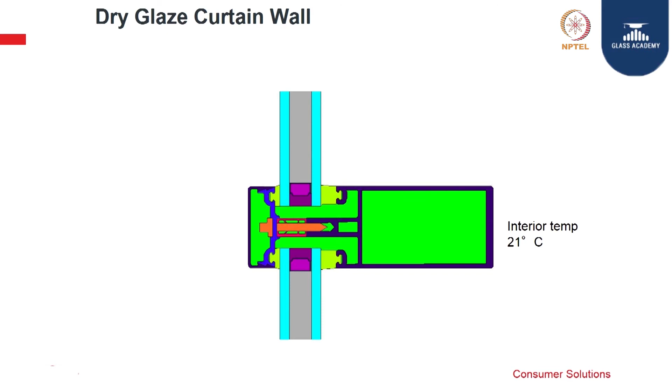I am going to talk about the fixing methodology of DGU, and then we will go into the details of every seal. I am quickly taking you through this to give you a feel of how you fix a DGU, and how it also conducts temperature in a climate like ours, which is hot outside.

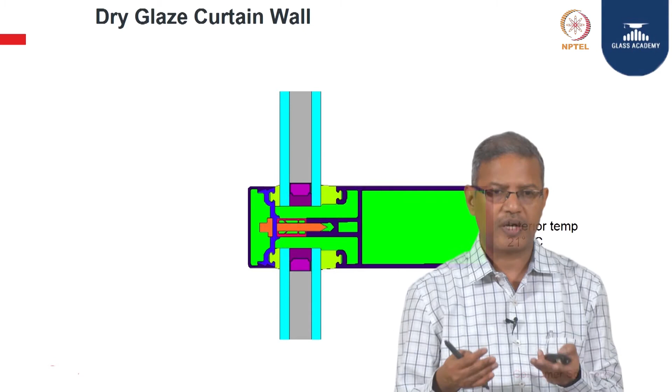So you have a thermal conductivity which happens when you have systems which are dry fixed, in comparison to structurally glazed facades. So you have an EPDM gasket system, and this is a pressure plate being used, and you also have a thermal isolator. This system is fixed in a dry manner.

You do not use a silicon, you use gaskets to completely fix this. So you need to maintain an interior temperature of 21 degrees. Generally the aluminum frame is of this size, and there is a DGU used, which has got 6 mm glass, 12 mm airspace, desiccant, primary seal and secondary seal. This system is called a dry glaze system.

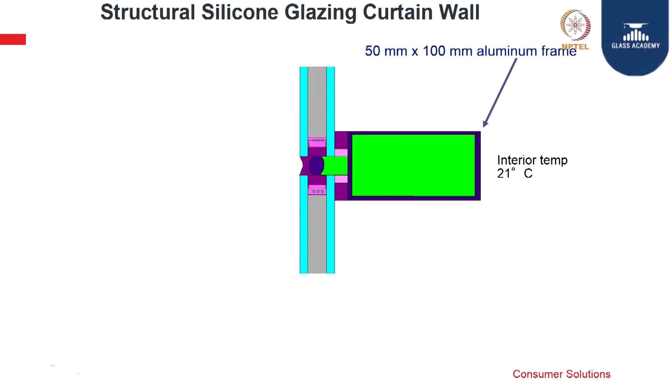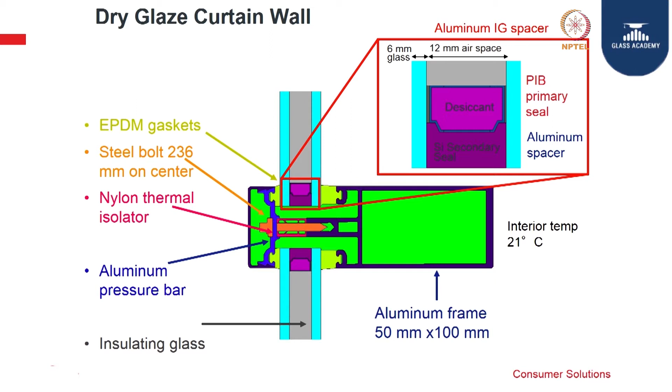Now we will see what happens when you subject it to atmospheric conditions, and before that I will also take you through the other system called silicon structural glazing curtain wall system. If you see here, there is a silicon secondary seal and a desiccant system, and an aluminum spacer.

Here we are looking at structural silicone glazing curtain wall, and we are also talking about a system wherein you do not have a mechanical capping from outside, so there is no conductivity which happens because of that. You have a glass structurally bonded to the aluminum using a silicon sealant, and there is a weather seal. So this is thermally completely isolated, and you do not have any connection which happens here.

The joint dimensions are mentioned here, this is the bite and this is the glue line thickness, and here the secondary seal is inside the DGU. There is also a backer rod applied for the weather seals.

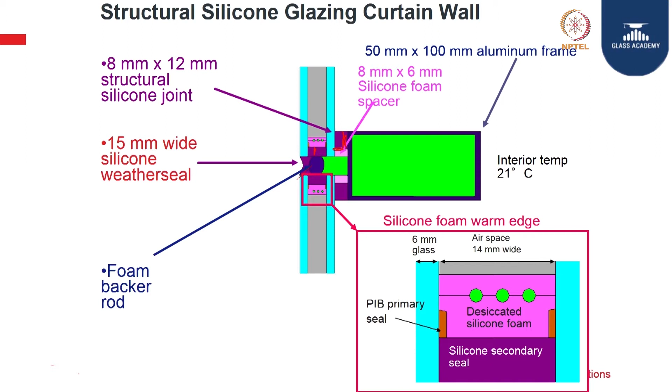So there are 3 different silicons, or sealants, which have been used to hold this unit together, with the same amount of aluminum frame. And what we are talking about here is also different desiccated silicon foam spacers, which are called thermal spacers.

What happens for the temperature evolution for the SSG system at 50 degrees? Imagine there is 50 degrees centigrade, and you have a high performance glass with a silicon spacer, and you have a high performance glass with an aluminum spacer.

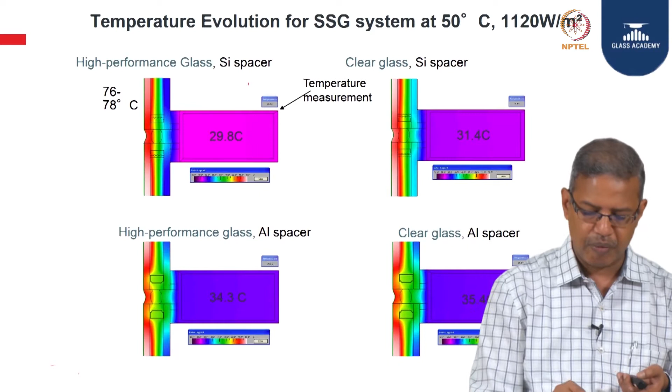Here we are talking about a difference with the same way of doing the system, and then we see the temperature difference. So what you have here is, when you have a temperature evolution at 50 degrees, you get 29.8 degrees when you use a thermal silicon foam spacer, compared to the aluminum spacer, which is 34. So there is a difference of almost 5 degrees here, 4.5 degrees, where the temperature becomes warmer compared to using a silicon foam spacer.

So here it is a clear glass comparison. It is 31.4, because there is a clear glass with no coating, so naturally the temperature is going to go up, and with an aluminum spacer you get 35.4, which is around 4 degrees difference. So what it essentially shows is, just by using a silicon foam spacer, you can also reduce the temperature, and what the conductivity is, and what happens through the system.

So this essentially talks about just doing a difference of silicon spacer versus aluminum spacer, with high performance glass versus clear glass. There is always a difference of 1.6, and within these two, 4 degrees and 4.5 degrees.

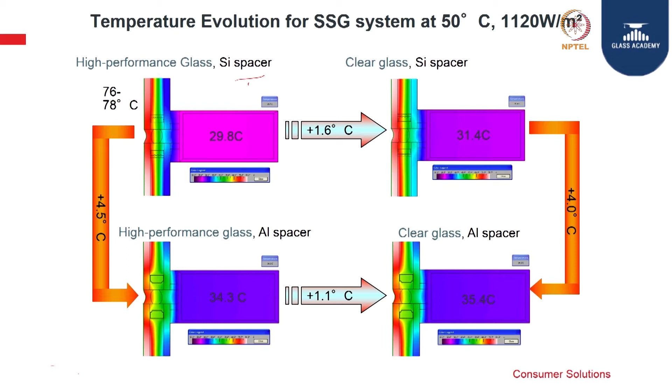And a dry system versus wet system, we saw the dry system, now we are going to see the wet system, which is silicon glazing versus the gasket fixing.

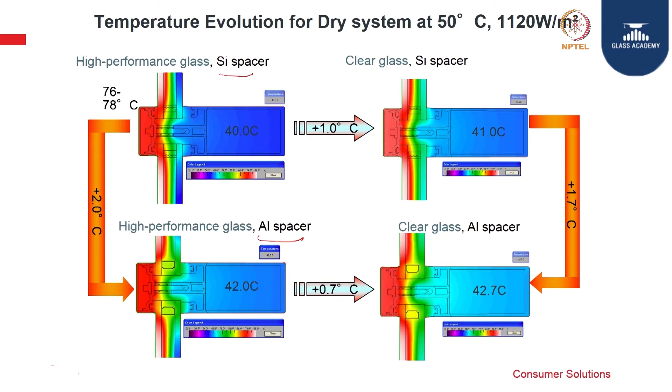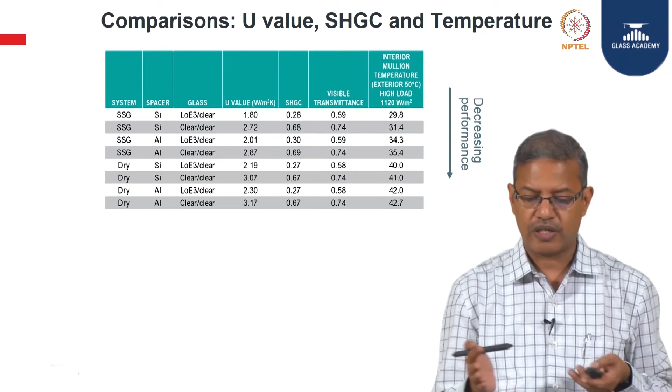So essentially what it talks about is, just by doing a proper selection of the spacer as well as the way it is bonded to the structure, you get very good temperature reduction, and silicone structural glazing again gives you the best possible thermal reduction.

There is a way of doing the bonding applications. So, some of the things we saw, that is the same thing put here. This also talks about the U value. If you have a silicon spacer and an aluminum spacer, what is the reduction of the U value, or how it becomes really good to have a lower U value, because you get 1.8 versus 2.01 when you do a silicon spacer versus an aluminum spacer.

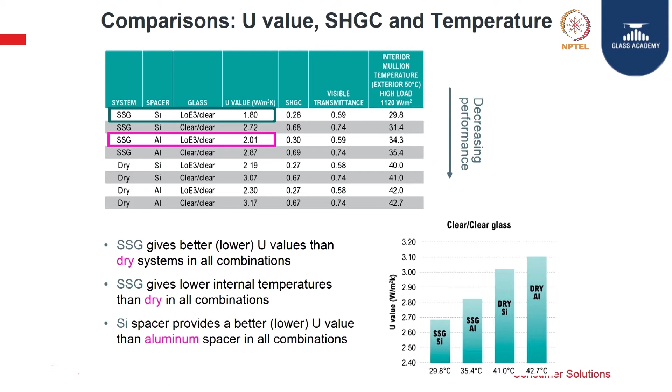So what we are talking essentially is, you get good durability, and it gives better U values than dry fix systems. So, structurally glazed systems give you better U values than a dry fix system. SSG gives lower internal temperatures than dry in all combinations. You use any combinations of dry fixing and structural bonding, naturally you save. Silicon spacer provides a better U value than the conventional aluminum spacers.

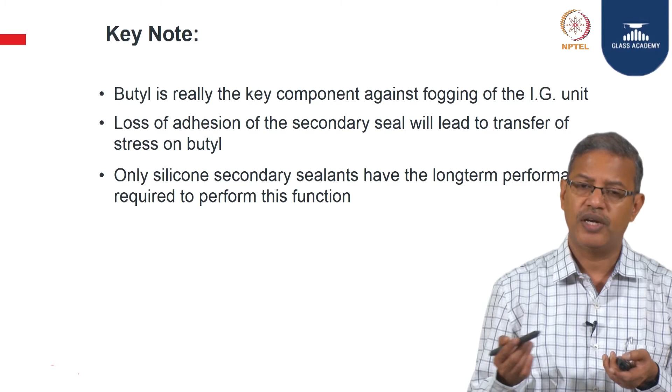So, the key note here is, if you remember, we saw the keynote earlier about sealants and the essential way of doing seal applications. Now, the keynote here is butyl is really the key component against fogging of the IG unit. Any stress on the butyl and there is a failure, that can lead to IG failure. Loss of adhesion in the secondary seal will cause stress on butyl. Only silicone has the best long term performance.

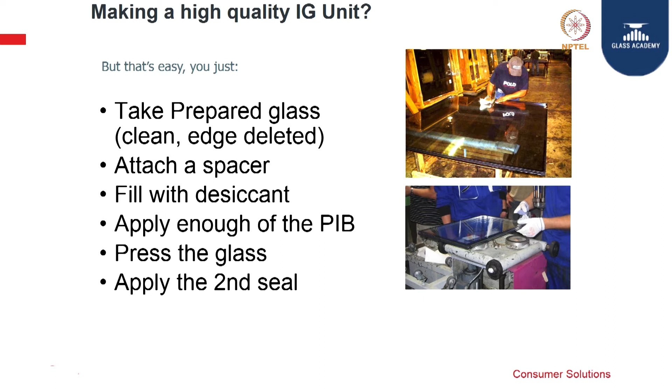So now we will come to the application part. We saw the chemistry part, we saw the different testing and experiments, and we also saw how a combined system of primary and secondary seal with silicone and PIB gives the best durability. We also saw the ways of fixing the DGU with dry and wet glazing, and the effect of that on the U value, and how, by choosing the right coating, the U value can be reduced and also the solar heat gain can be reduced.

So these are all essential parts of DGU, but when it comes to manufacturing of DGU, the application is very critical. So how you do it is: take a prepared glass, clean it, and if it needs an edge deletion, delete it properly using the proper gauge grinders or the mechanism suggested by the manufacturer, then attach a spacer.

So before attaching the spacer, you need to cut it to the size of the glass, then clean the spacer, fill the desiccant, apply enough PIB around the perimeter of the spacer, press the glass, press the spacer, press the glass again, and apply the secondary seal, either manually or by robotic application.

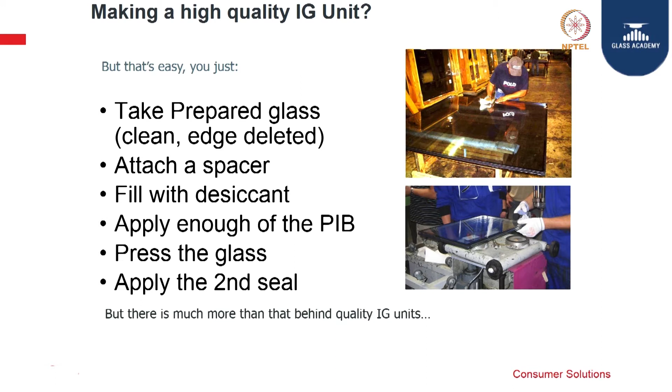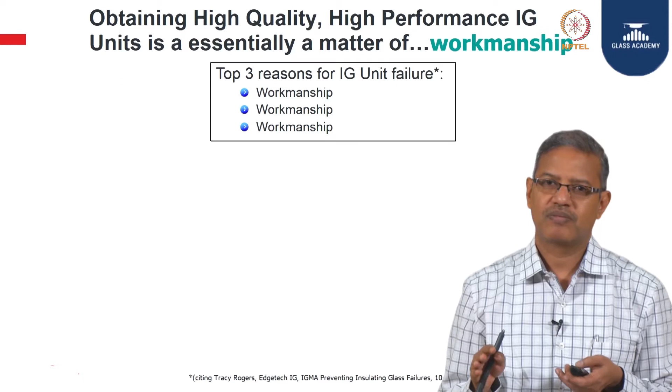But there is much more behind these IG units. So, what are the top 3 reasons for IG unit failure? The top 3 reasons for IG unit failure are workmanship, workmanship, and workmanship. So it is very important. You can design well, you can choose the right product, but if the workmanship is not good, you will essentially end up with a very bad quality DGU.

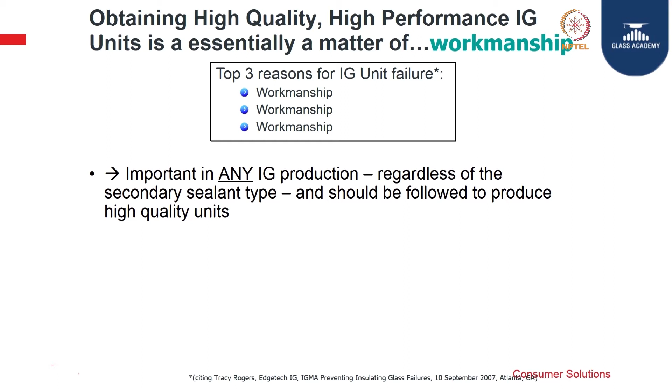Any IG production, regardless of the secondary sealant type, should follow a high quality production process. So what are the things that influence the performance of DGU? The spacer is a very critical component here. The type of spacer used, how you join them, how you fill the silicon desiccant into the spacer - they are all very critical. I have a slide to run through the spacer which I will take you through.

PIB application - how do you apply the PIB? This is a very small amount of primary seal applied on the butyl spacer. There are standards that specify the minimum grams per running meter you should have, which is approximately 3 grams per running meter minimum, and there is a width and thickness specified. It talks about filling that complete band, which is good for long term durability, with a thickness of say 0.3 or 0.4, so it's about 2.7 to 3 grams per running meter per side. You have to apply it accordingly.

Pressing of the panes - the glass panes should be properly pressed so they come into good contact with the primary seal and the spacer properly, then apply the secondary seal.

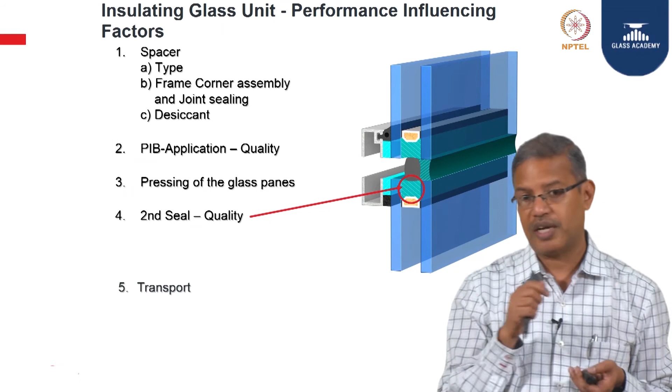One more thing which is essentially important is, before applying the secondary seal, we should ensure that the spacer is cleaned. So the spacer cleaning is very important to get good bonding of silicon to the glass edge as well as to the spacer.

Transportation is key. We need to transport only when the sealant is cured completely. If you do a transportation before that, there is a lot of stress which will come onto the sealant due to the vibration during transportation, and that can affect the adhesion of sealant to the substrates, and what you will essentially have is a gasket, not a bonded material.

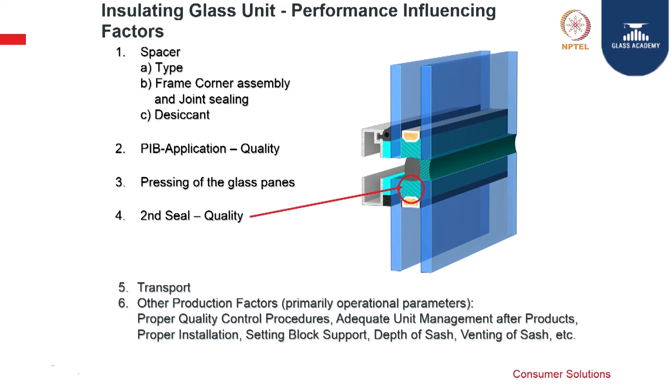Also, when it has been essentially installed, it is important for us to understand how it has been installed, what type of material is coming in contact with the secondary seal of the DGU, how much is the depth, and how it is going to be perimeter filled with. Those things are also important to understand. So I will quickly take you through some of that.

So the thermal stress induces shear. We are talking about the spacer, which is an important thing for the longevity of the IG unit. There are different types of spacers you can have. Thermal stresses actually, because it is a metal, it is going to conduct heat. So there is going to be a differential movement between spacer and glass as well. Essentially there is going to be some movement when it happens, so there could be a failure in the primary seal.

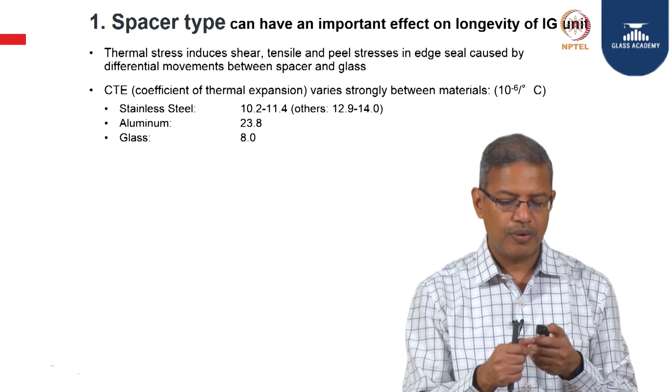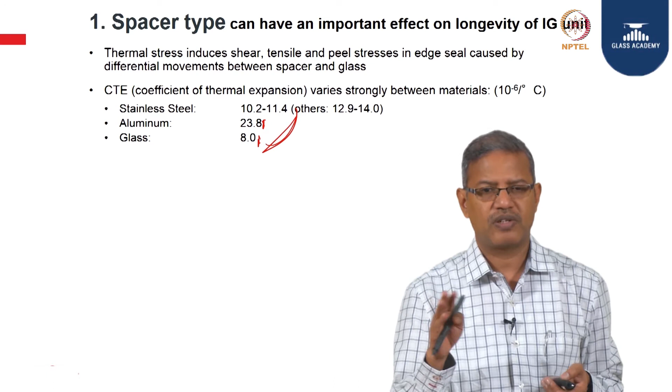The stainless steel has got 10.2 to 11.4 millimeter per meter per degree centigrade, 10 raised to minus 6. Aluminum has the highest, and glass is 8. So if you see the combination, when you do glass and aluminum, there is a differential movement because of these values, 23.8 versus 8, whereas these two are close. Stainless steel spacers and glass, the differential movement is lower.

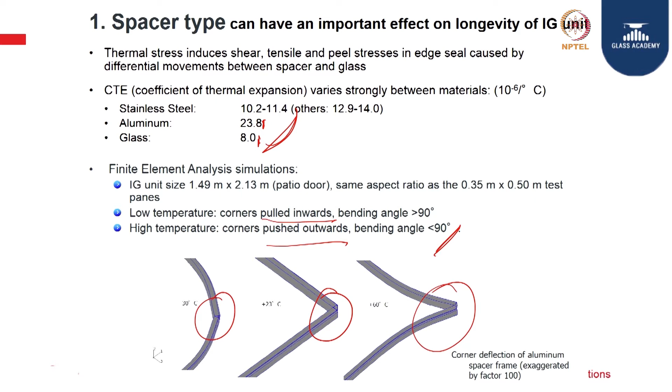This is a simulation done on finite element analysis at a lower room temperature and a higher temperature when an aluminum spacer is subjected to it. At lower temperatures like minus 30, this gets shrunk, it becomes shrink, and this is the normal temperature, and this is simulation. This is slightly made it big, but this is what essentially happens when it becomes plus 60 degrees centigrade, it expands. You can see the change of behavior on the corner. At low temperature it is pulled inwards, at high temperature it is pushed outwards. So its bending angle is greater than 90 here, and less than 90 here.

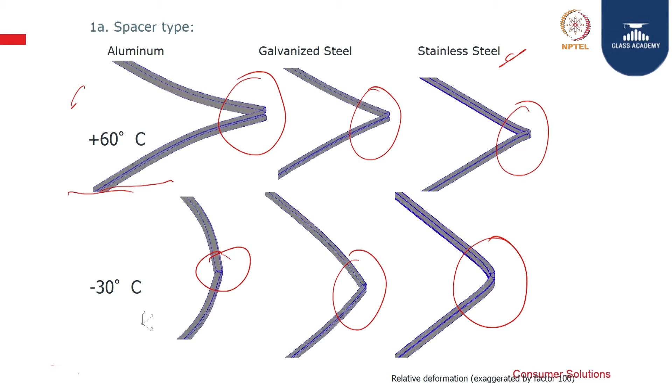So this is what happens with aluminum. You can see this galvanized steel is better, stainless steel is the best. Same thing at lower temperature: aluminum, galvanized steel and stainless steel. But essentially in India we use mostly aluminum. You can also look at other materials like stainless steel, which can give you much better DGU long term performance. And also the spacer frame corner assembly and joint sealing.

So spacers are able to accommodate part of the movement of the IGU, like warm edge spacers, if you have them, they do not have much differential movement because they are not metal essentially. And also if you are doing a bending or connecting of the spacers, no gap should be there, or steps should be there.

Corner keys again need attention with PIB, any joint area should be completely sealed with a primary seal to avoid any moisture penetration. If you are doing a butt joint, do it on the longer edge, middle of the joint, long edge rather than on the short edge, because when they are subjected to stress, the short edge gets differential load, so you may have more stresses on that.

Speed of bending, how you bend the spacer - sometimes you do it fast, it may lead into micro cracks, and then essentially the breakage of the spacer when it is in use, and then essentially the failure of the DGU.

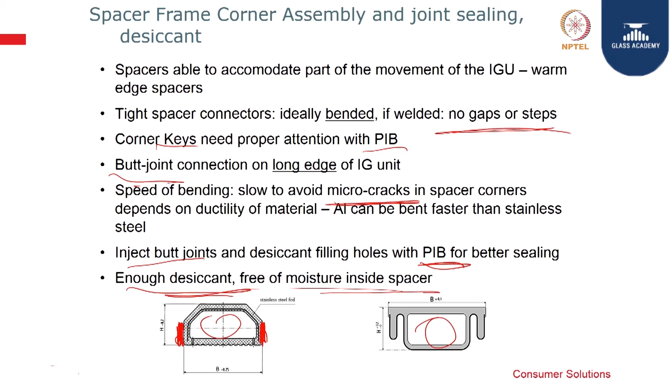Also any joints you fill it with PIB, enough desiccant has to be filled inside the spacer area to keep the air dry inside the DGU, since there is some moisture penetration, the desiccant helps to absorb them.

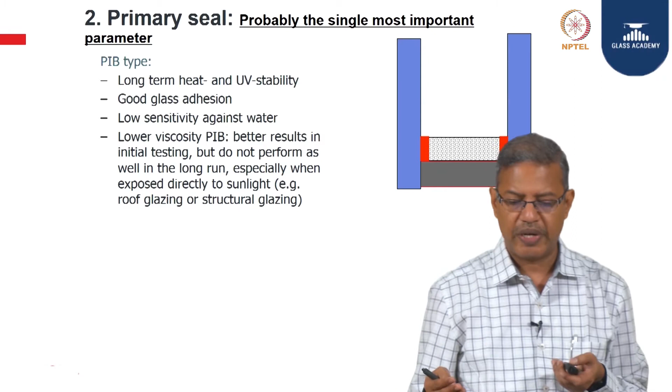Primary seal, we are coming to the second one, the primary seal which is already glowing. This is a very important seal for DGU to give long term durability against fogging. It has to have good heat and UV stability, good adhesion to the glass and the spacer, low sensitivity against water, and lower viscosity PIB.

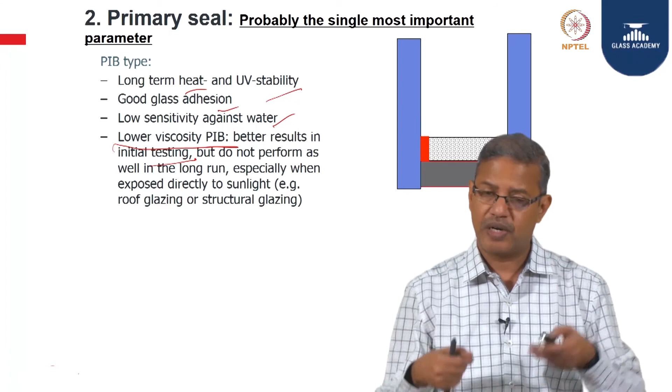Better results in initial testing, but it does not perform in the long run. If you have a material PIB of lower viscosity, maybe it is easy to apply, but it will have a tendency to run down with time, directly under sunlight, roof glazing, or structural glazing.

Also on the equipment side, maintain clean applications. When you see some of the PIB application machines, they have cured material on the belt or on the edges, which will not allow a good uniform application of PIB. Extrusion pressure and temperature is critical.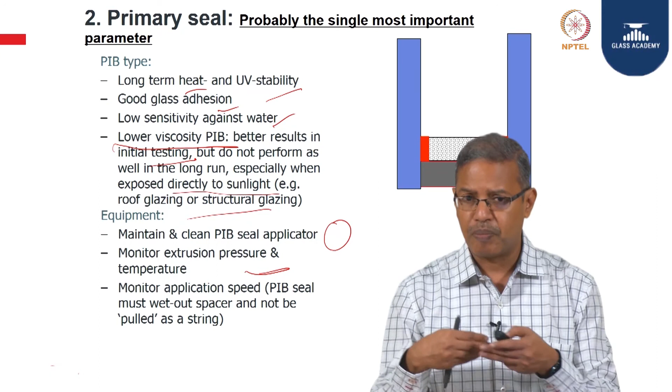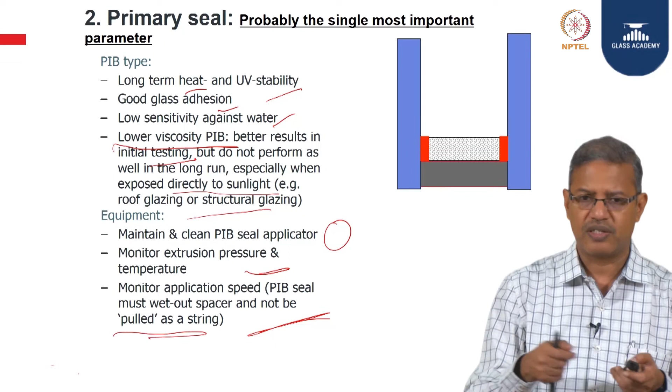Maintain the temperature so it comes out nicely, and keep the pressure so it touches and fills properly. Monitor application speed - do not run it so fast that you are unable to fill it properly, and it should not be pulled as a string. It should wet out the spacer, not be like a line. So these are some of the guidelines.

Greater than 4 millimeter width and 0.3 is essential. 3 grams per running meter is the weight of PIB to be applied, and also avoid skips - there should not be any areas where there is no primary seal. Good surface wetting and flow during glass pressing, so it should be nicely wet, 0.3 mm thickness and greater than 4 mm. This is very essential for the primary seal.

You can visually see it, you can control it. These are not things you cannot see - during application you can see them.

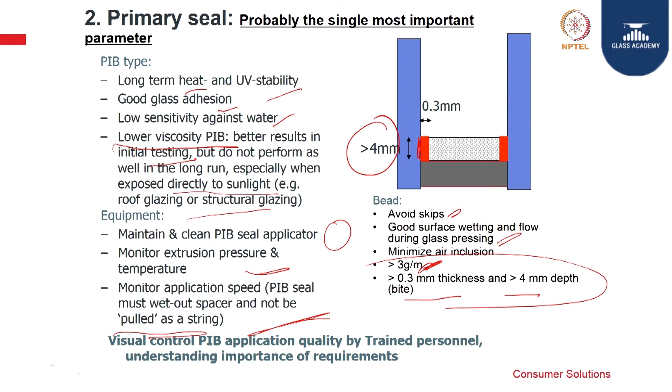Third is pressing. Once you make the clean glass and apply PIB, then you press it - press the spacer to the glass, and the PIB is viscoelastic. So it flows under low shear rate, behaves elastic under high shear rate. If you pull it fast, it will behave elastic, but if you pull it slow, it will come out. Temperature matters - the colder, the more elastic, and the hotter, the better it flows.

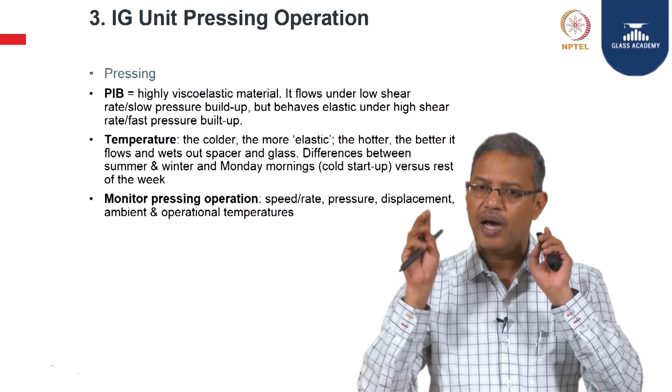What is important to understand is when doing application in lower temperature, or in an uncontrolled atmosphere where you don't monitor all this, if you have winter or summer, this will affect the application of the PIB. Also monitor pressing - it has to be properly aligned so you get a uniform gap around the perimeter, then press the other pane onto the spacer.

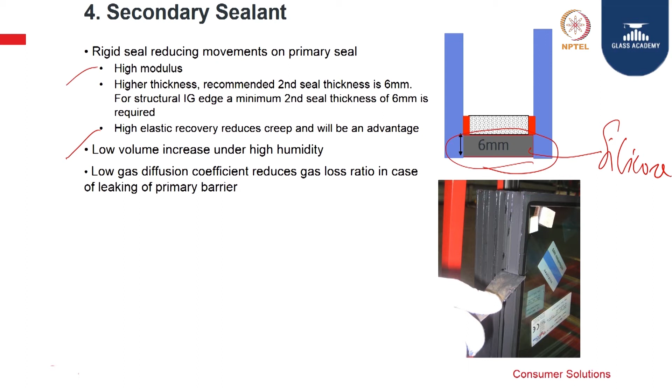Secondary sealant - the minimum is 6 millimeters which has to be applied. This is the secondary sealant, silicone here. It should be high modulus, and for structural edge this is minimum 6, with low volume increase under high humidity. You have to select a product which is always silicone for the secondary seal, and as a combination they give the best durability.

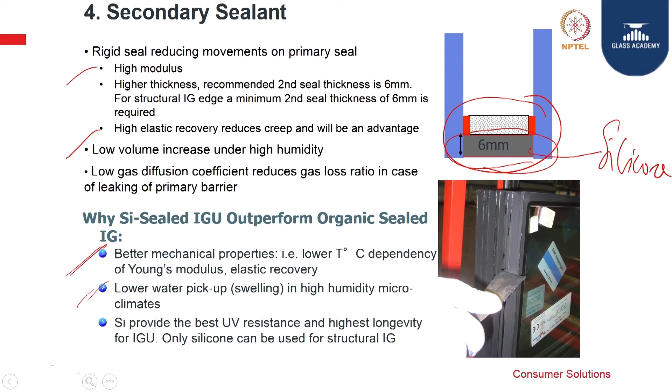Just to bring it back - with silicone you get lower temperature dependency, better mechanical properties for the long term, very low water pickup since it is actually water resistant material, and best UV resistance. So you get long term durability.

What are the essential things for the DGU? When you receive the material, always look at the batch numbers and the shelf life, the expiry. You have to have material with minimum shelf life of say 2 to 3 months when you actually start using it, and there is a condition mentioned as storage temperatures.

Always store this material under 30 degrees centigrade for both part A and part B. If it is not in use on a machine, and you are going to keep it for a longer time, you can remove it, pack it airtight, and then keep it in the stores.

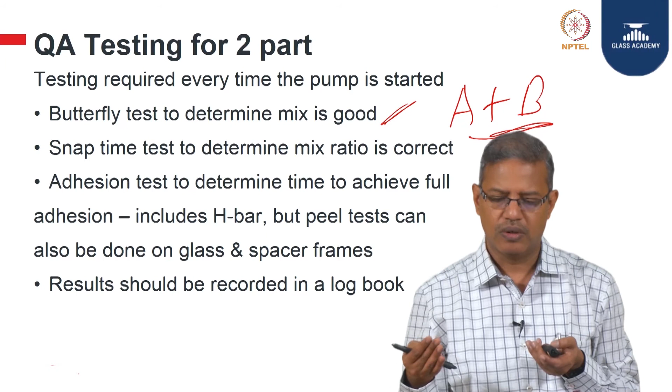The tests which are to be taken while applying the secondary seal include the butterfly test. You are mixing two components, A and B, which have a black and white component and must have uniform mixing. When you mix it, it should not have streaks of white or dark blacks; you should have a uniform color mix.

Snap time is to check the ratio between A and B. There are recommended ratios from the manufacturers, generally 11:1 to 13:1 by weight, so you can always be in the range of 12:1 by weight. You also have to check adhesion of secondary seal to glass as well as the spacer, using tests like the peel test, glass butterfly adhesion test, and H bar test, as part of the QA program.

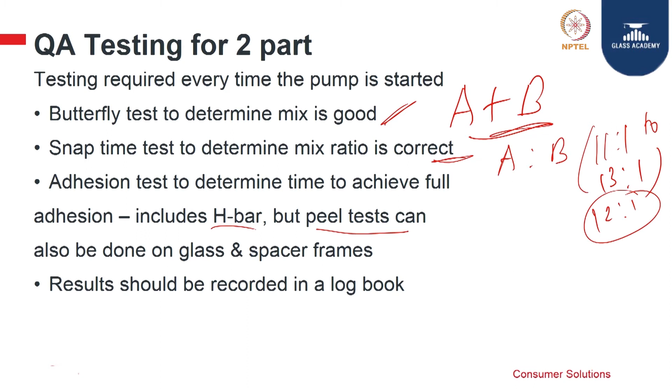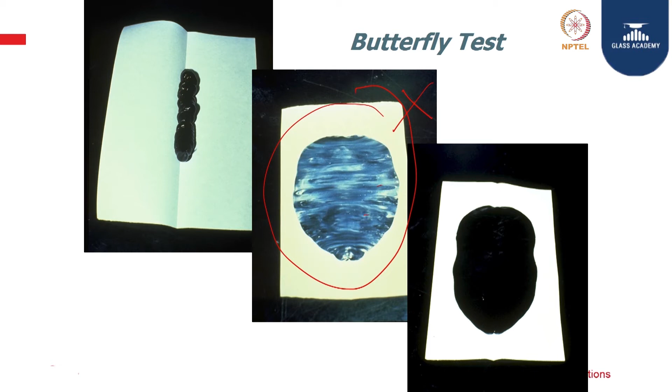If you do not have a good quality mix, this is rejected as bad quality, or even if you have some streaks, that is also rejected. So what you need is this uniform mix.

The second test is to check the ratio. You take a small amount of mixed silicone in a cup, put a spatula, and when you initially pull it, you will find a string. After some time this will snap. For most products the snap time is between 35 to 45 minutes. This can be slightly affected by climatic conditions, but anything in this range is really good.

The peel adhesion test, H piece, and butterfly adhesion test are very important quality control checks we have to do prior to applying silicone onto the DGU. You have a glass spacer, apply a small amount of silicone onto the spacer after cleaning it, and pull it.

You do the same thing on the glass: apply a small amount of silicon, allow it to cure after 24 hours, then pull it. When you pull it, the silicone should not leave the substrate and should come out clean. The H piece test involves making a joint like an H.

You take two panes of glass, apply silicone in the middle, and allow it to cure. Then pull this apart using a tensile testing machine, and you can see the failure should happen within the silicone itself, not on the bonding area.

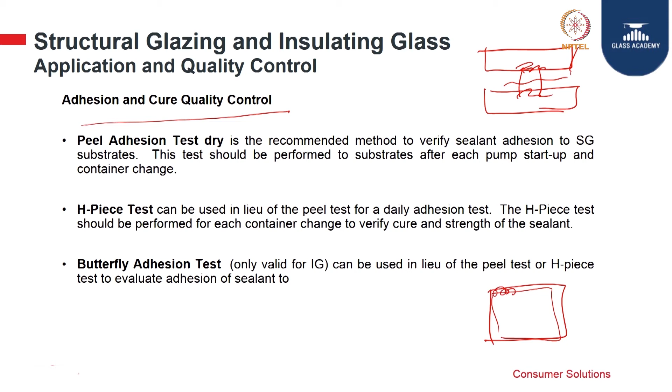The butterfly adhesion test is a very normal test. You take two panes of glass, put a spacer around, and apply silicone on only one side. After 24 hours you open it like a book, and you will essentially see how the silicone is bonding to both glasses and the spacer.

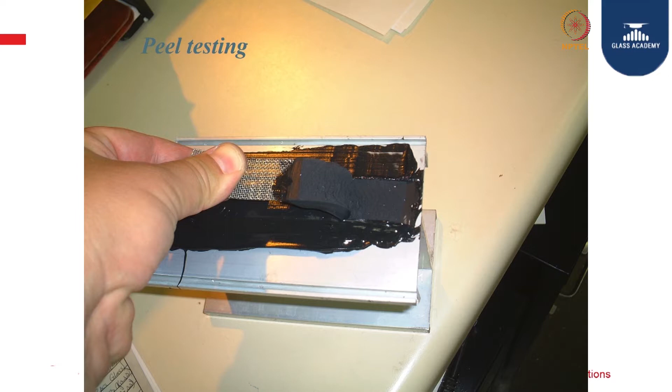This is a picture showing the peel adhesion test. You have to do it on the glass and on the spacer. After 24 hours you just pull it, and what is essential is that it should not leave the substrate and should come out clean. This is called good adhesion.

This is the butterfly adhesion test. You take a one foot by one foot glass, put a spacer around it, either way you can do it. You put a secondary sealant on one side or the other, and then open it like a book. When you pull it, you can see the adhesion of silicone to the spacer and to the glass; it should not come out clean from both substrates.

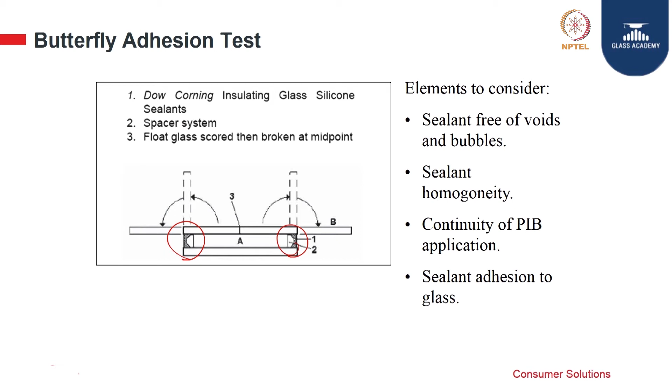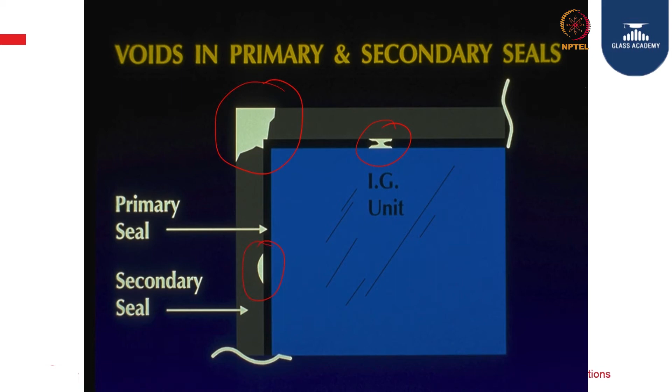You should fill all primary and secondary seal throughout the perimeter of the DGU. There should not be any gaps or voids, and at the bend there should not be any discontinuity. It should be a continuous application like this, full all around.

If the spacer is misaligned, you are going to have differential secondary seal bite, which is not good for taking the loads.

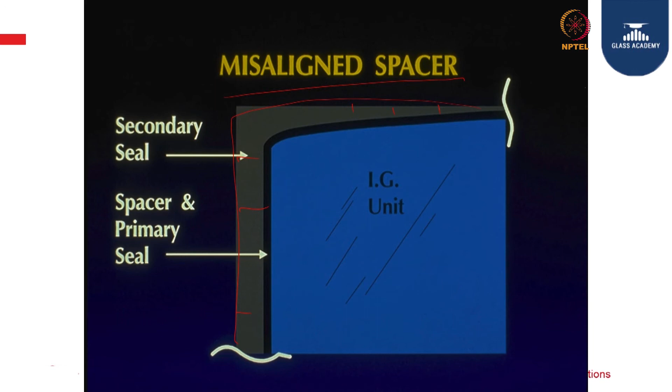Then you have to pack them properly and allow them to first cure. You have to have a curing of 24 hours for 2 component, and depending upon the bite size, 7 days for 1 component. For a 6 millimeter bite, generally you would need 6 to 7 days to cure if it is a 1 component.

But most of you do not use 1 component, you all use 2 components, so the recommendation is to keep it for a day. And then pack it nicely, you do not allow them to have differential loads between the 2 panes.

Even while stacking, if you are stacking vertically, ensure that both the glasses are supported properly and there is no differential load coming on the sealant when it is in uncured stage.

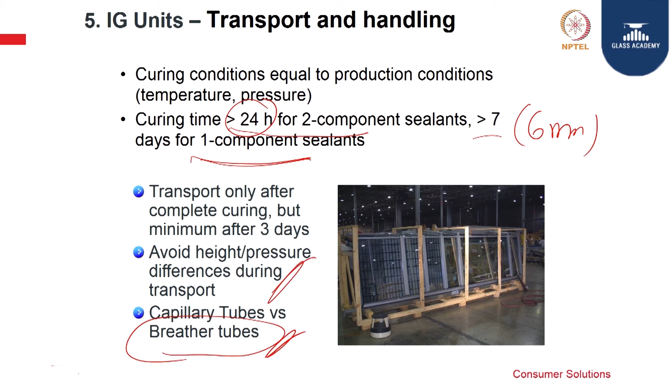And avoid height pressure differences. So if you are doing an application at ground level, sea level, and then exporting it to a very high altitude, you have to have breather tubes or capillary tubes to untie them, so there is no pressure difference which will cause a concave or convex shape in the DGU. This is something you need to understand depending upon the installation site's height.

So to summarize, what is important to make a high quality IG unit? Glass - you need to have a smooth glass surface, no rough surfaces, no coarse coatings. Ensure good wetting of silicon on both primary and secondary seal, and also remove whatever high performance glass coatings need to be removed - check with the manufacturer on how much has to be removed. Clean and wash the glass panels properly, using the proper water quality to clean them.

Spacer - set it properly, bend the frame, maintain that constant width around, and position them properly. Apply butyl smoothly for the required width and thickness, fill enough desiccant, and it should be fresh. The desiccant also should be tested for its temperature rise as well as moisture absorption.

Clean and prime the spacer if required - some spacers need cleaning and priming. On the butylization, maintain the machine. These are essential things - 3 grams per running meter, greater than 4 millimeters of width and 0.3 millimeter thickness. These are all important to give you a good tight primary seal.

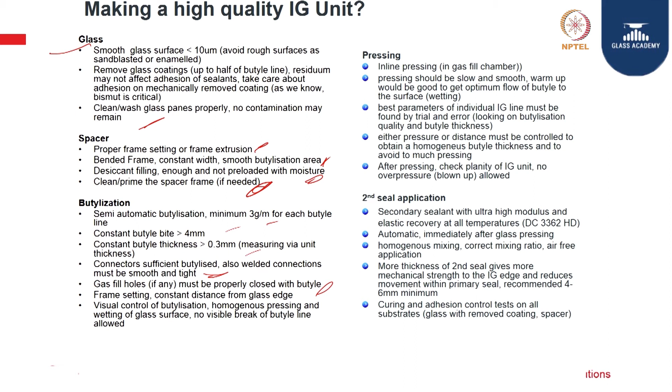Connectors should also be properly butylized, and if there are any holes for gas filling, that has to be plugged properly. And frame setting - you have to set the frame properly so that you have constant edge throughout the perimeter. You see visually, and if you see any breakages, redo it.

Pressing - inline pressing, you can do inline gas filling. It should be smooth and easy, not very rough, and it should not compress the material so much that the primary seal comes inside the DGU. When you press, you get homogeneity around the perimeter, not too much thick and thin butyl. No overpressure or blown up allowed after pressing.

Secondary seal - which is again silicon sealant. The silicon sealant is ultra high modulus, you have to use one which has got good elastic recovery at all temperatures. Products like 3362 or 982 are generally used. You can do an automatic application, or a manual application around the perimeter. Check the mixing, check the butterfly test, check snap time, do peel adhesion test, and design the secondary seal depending upon the loads coming onto it. 6 millimeter is minimum - generally we do not recommend 4 for any commercial glazing applications.

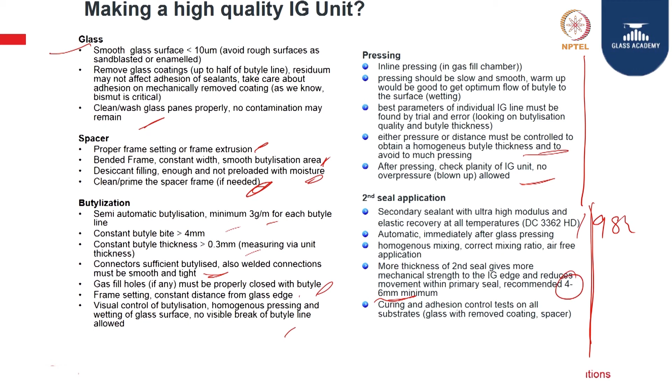So what you need to do is, whatever tests you do, you document them and maintain records - for a glass test, you either do the butterfly test on glass or on paper. Snap time test. Mixing ratio is for the pump, to check the quality of the pump. Delivery of material is done randomly, so you do not need to do it every time, but it is required as a diagnostic test - you can do it once a month.

Peel adhesion test is very essential, on glass as well as on the spacer. You can do H-piece or peel adhesion - butterfly adhesion is another way of doing the H-piece test. You can do this intermittently.

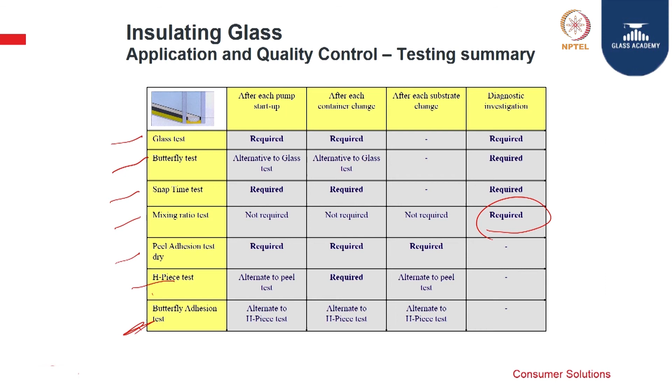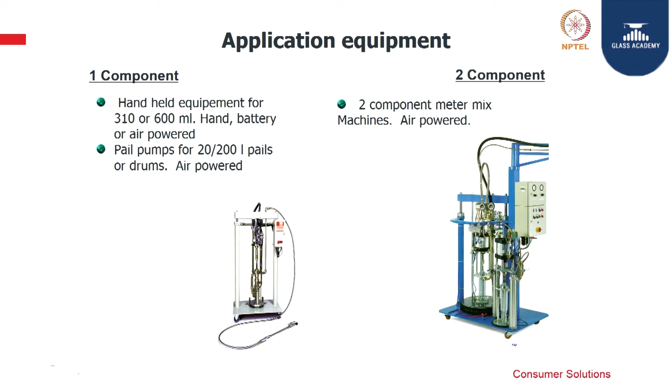For application equipment, you need a good dispenser from a reputed manufacturer who gives you service, or you can have your own service engineers maintaining this equipment and checking the edge seal, air pressure, indicators, the valves, and cleaning the hose and mixer properly, so that you do not have time-to-time breakdowns.

This is an interesting case I wanted to show, available from Cardinal. When Cardinal started making their DGU in 1976 with aluminum spacer, PIB and polysulfide, they had a failure rate of up to 8% when the life of the DGU was moving from 0 to 20 years. They give a 20-year service life because their process is so nicely managed.

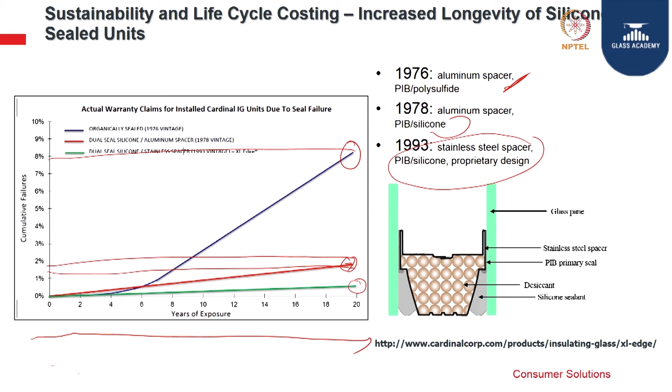Then in 1978 they changed to silicone, and you can see it immediately dropped from 8% to less than 2%, even 1.5%. This was significant. When they moved to stainless steel, PIB, and silicone, which is their own proprietary design, it dropped further to 0.5% or even lower. So choosing the material combination and doing good quality control throughout the process, you can reduce the defects that happen on the DGU over a 20-year life.

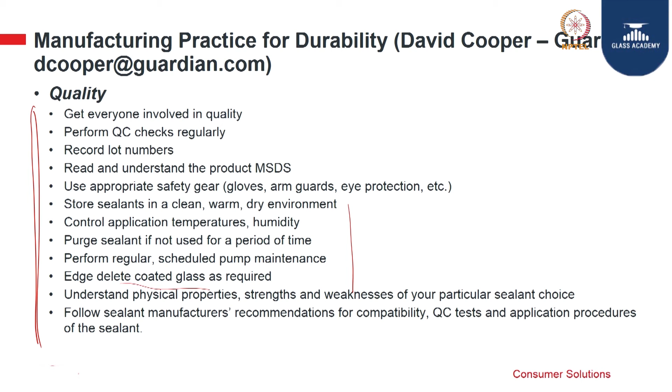As per them, these are the important things they always talk about: get everyone involved in the process of making a good DGU. Do regular quality checks, maintain records properly, understand the products and their behavior, use proper safety PPEs while using the materials, store the material properly, apply them in a good atmosphere, and purge the sealant periodically so that you do not get the cured ones. Perform regular pump maintenance, edge-delete coated glass as per the manufacturer's recommendation, and understand the total quality control application procedures.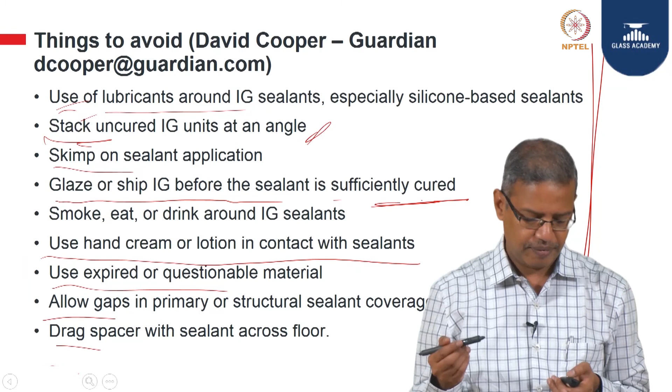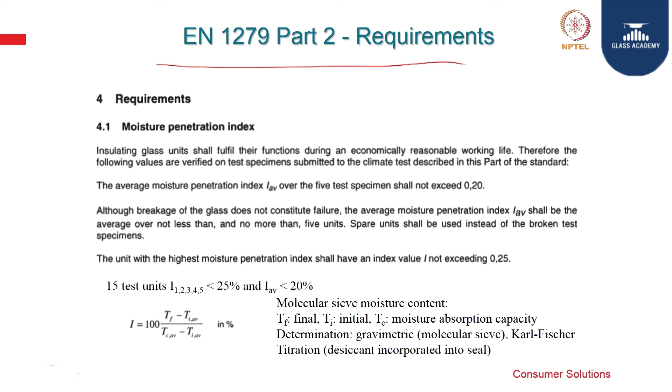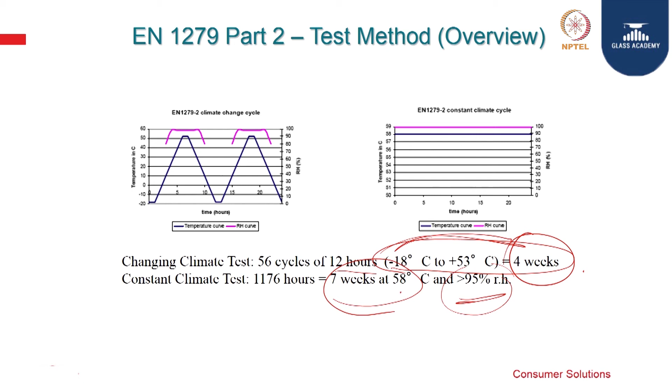Now, quickly through the standards: there are two standards covering long-term testing of DGU — EN 1279 and ASTM. In EN 1279, they do a climatic test at 12 hours between -18 and 53 degrees for 4 weeks, and 7 weeks at constant temperature with 95% RH. So there's a temperature change cycle done for 4 weeks from minus to plus, and at constant temperature they test at high humidity to check the durability of the DGU.

Whereas ASTM E2188 talks about durability in high humidity — 60 degrees centigrade at 95% for 2 weeks — but they also add weathering. They ask you to put it in a UV chamber where it's subjected to actual weathering conditions with temperature variation, water mist and UV for 9 weeks, and again high humidity for 4 weeks.

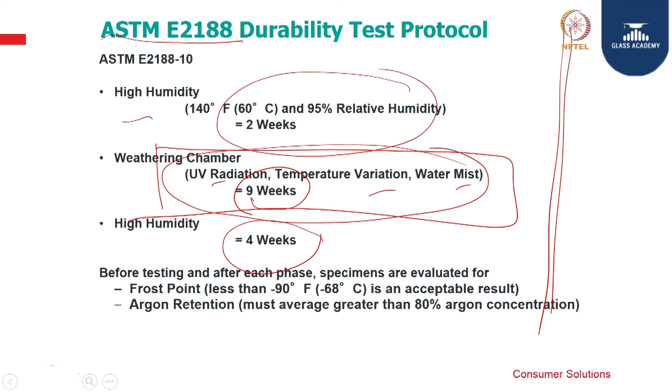What's important here is that in a climate like ours, UV exposure is a very essential part. EN is a very good standard, but it does not cover anything on UV. So what's essential is to adopt standards with test methods closer to our conditions, and ASTM seems to be closer.

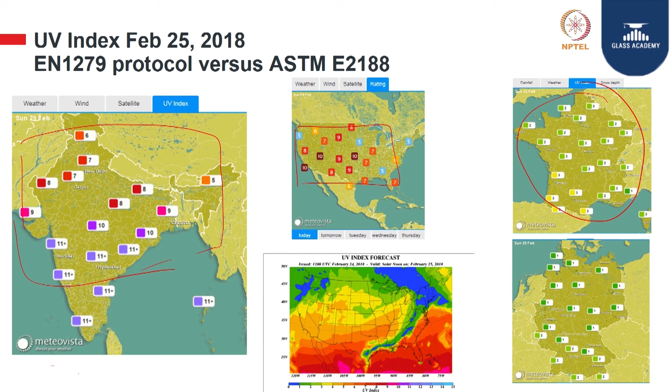Last, I am going to summarize. Only silicone dual seal insulating glass units are approved by the industry for use in structural glazing applications. We cannot have an organic seal put on a commercial glazing where you have degradation of the secondary seal, which happens. Silicone seal attaches the exterior lite of the light to the interior, and also the unit to the building. In structural glazing, the edge is visible. For roof glazing and skylights, again you can do it completely with silicone.

You can use different types of glasses in commercial glazing, and all of them are subjected to temperatures depending upon the climatic conditions, as you see here.

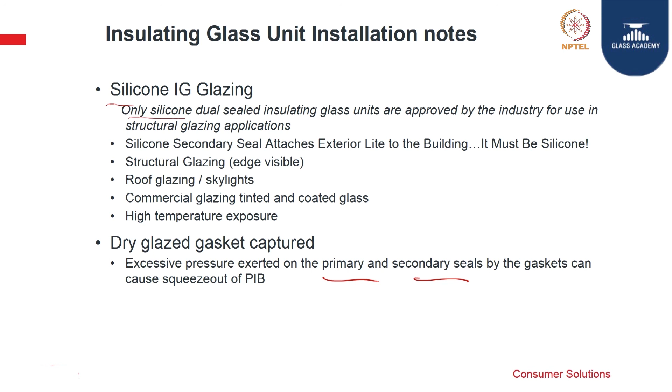With dry gaskets, excessive pressure exerted while fixing the dry system on the primary and secondary seals can squeeze out the PIB. Just be careful when you are using a dry system, ensure that the pressure is properly maintained. Also important is when you are using the DGU made with neutral cure alkoxy systems, do not use any acetoxy cure silicones in contact with the secondary seal of the DGU, or use this as a sealant for making the DGU.

Do not use anything with EPDM with sulfur, because this can attack the coating of the glass as well as the secondary seal. Do not use any bitumen based sealant in contact with the DGU secondary seals. Do not use any solvents which will migrate through the silicone. As I told you, there are some moisture vapor transmission rates silicone can allow, and it can also cause the PIB thinning. Do not use any solvent based water repellents around the perimeter of the DGU.

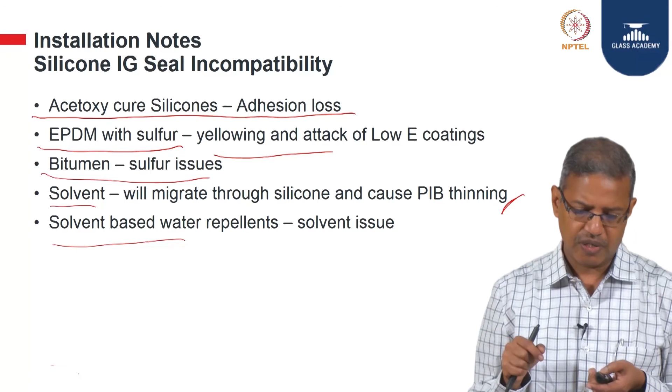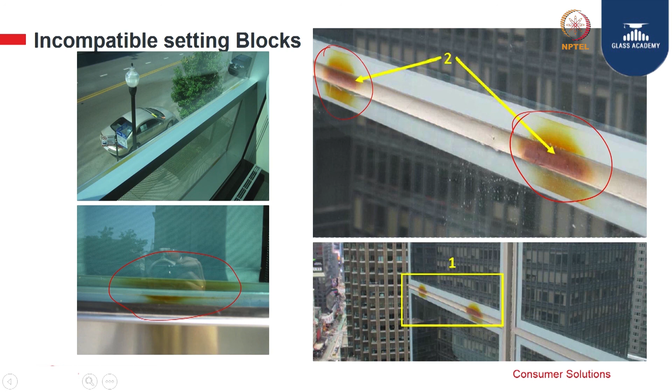Also, incompatible setting blocks, like if you use an EPDM with a lot of plasticizers or sulfur in it, can cause a color change and make it incompatible. You can see them here. These are essentially the effects of the setting block not being compatible with the secondary seal of the DGU, and these are the PIBs affected by the solvent.

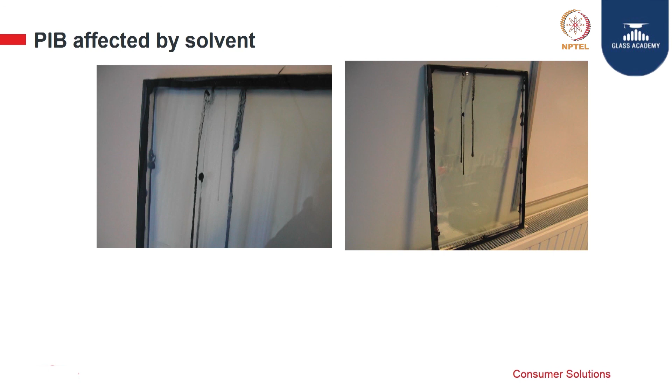Somebody has put a harsh chemical around the perimeter while cleaning, or while applying that on a wooden frame or something, so you can see the primary seal running down around the perimeter here. Here again, a wrong sealant has been used which is coming in contact with the PIB.

So last, what is important is you have structural silicone holding the glass, the entire DGU, to the frame. You have a secondary seal inside the DGU which is holding two panes of glass together. You have weather seals - they are subjected to wind loads, UV, sometimes dead load, and also differential thermal movement. Silicone provides a good flexible anchor for the long term.

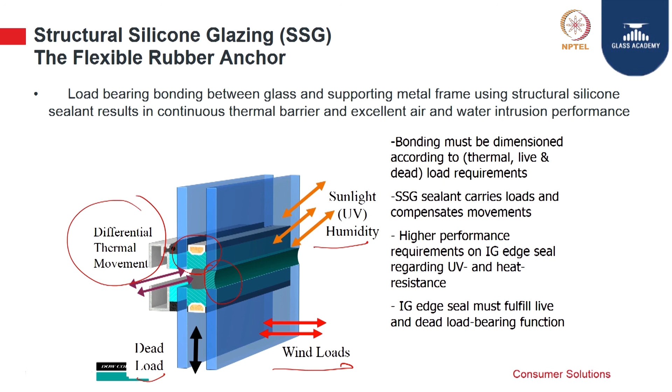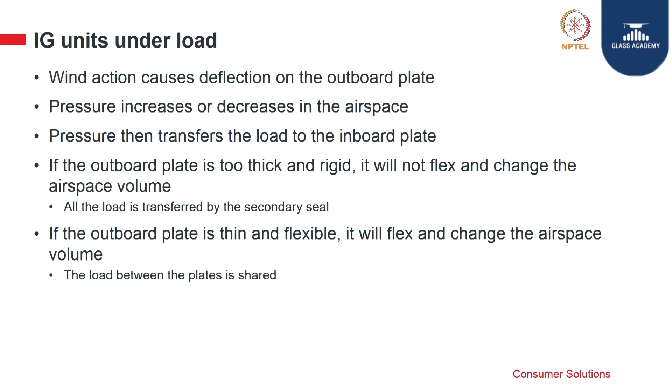So that is the right choice of material, but what you need to understand is that there are many parameters involved while making the DGU. So this is what I had today to share with you.

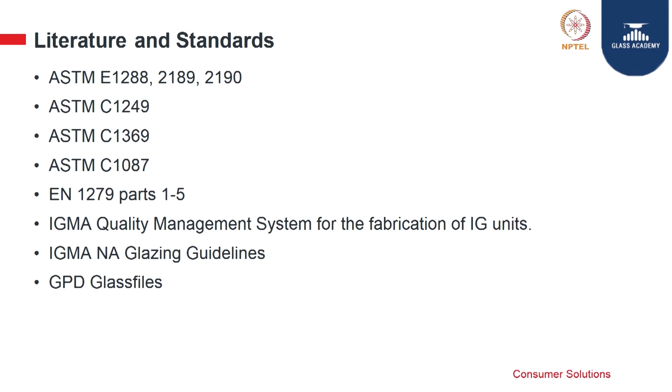Now, there are a lot of new trends coming in - people are coming with cold bent glasses in DGU. These are all new approaches, and there are a lot of stresses which will happen on the secondary seal. So essentially we need to evolve with the industry, keeping in mind that what we essentially need is a very clear DGU at the end of the day, which has good long term durability. These are some of the standards which you can refer to, and this will give you a lot of ideas about the tests which need to be involved while making a good DGU.

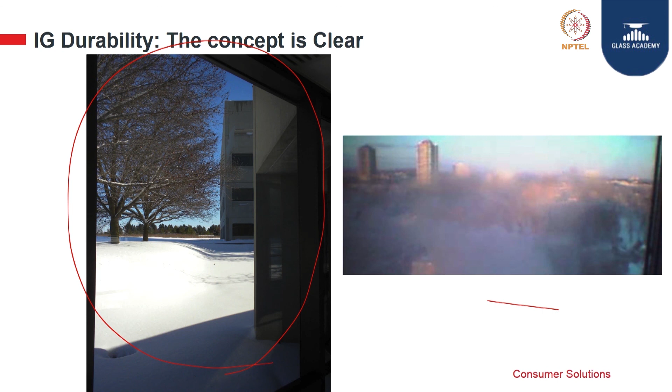So last but not the least, the concept is clear - we do not want the DGU to be fogging like this, and we saw what needs to be done to get to that.